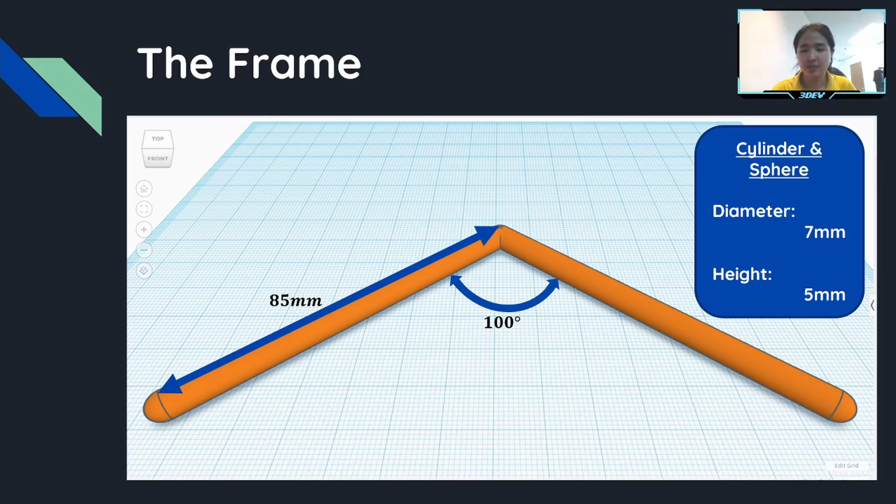Let's start to create this shape in TinkerCAD. Right now we are in TinkerCAD.

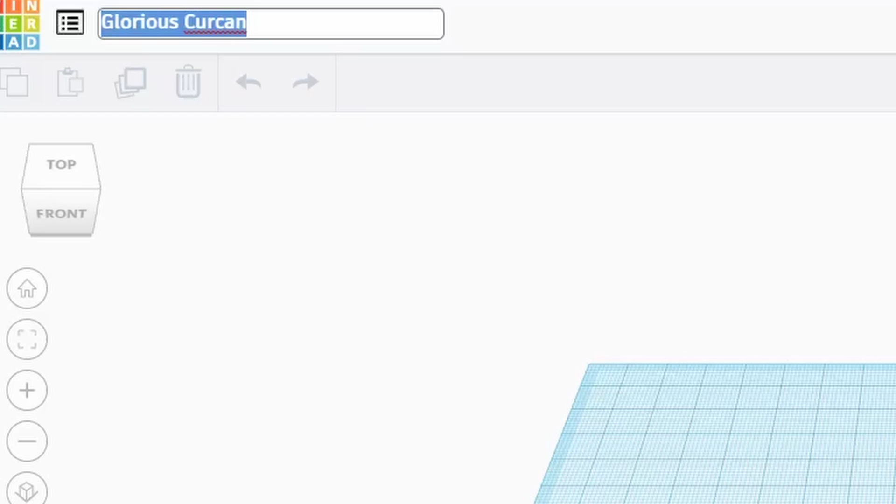First thing, we need to click on create new design to start design our self-balancing sculpture. So I click on create new design, and once I have the work plane, first I'm going to change the name. It is good that you always change the name of your project, so you know what project you are doing. I will name it self-balancing sculpture. Right now I have this project named self-balancing sculpture.

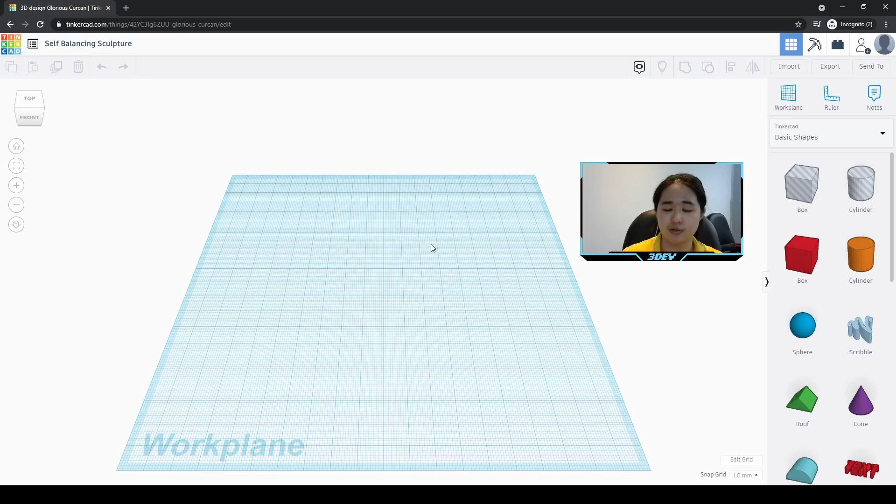So I have my work plane over here. First thing we need to do is create the frame. First, let's get a cylinder, and then we need a sphere also.

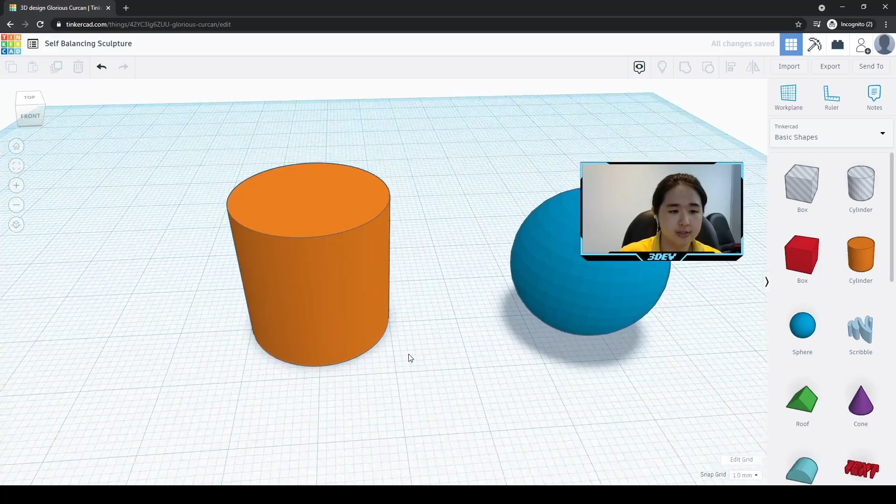First, let's change the sides of this cylinder to the maximum and the segment, or else you will see the points for this cylinder. So I will just increase the sides and the segment to the maximum so that I will have a smooth cylinder. Basically, first thing I want to do is make this round become oval.

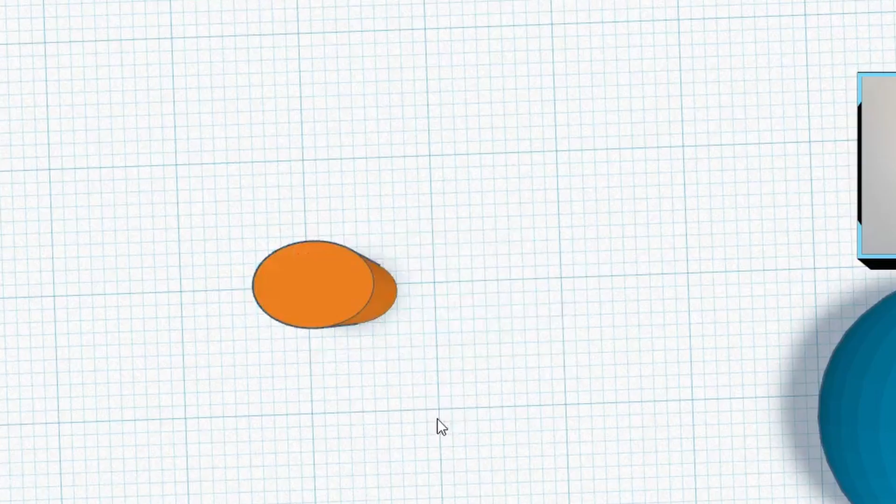Now I am at the top view. I want to make this a bit oval, so I'm going to change this one to 5 millimeters. And the diameter for the X, I will change it to 7 millimeter. Then we will get a shape like this.

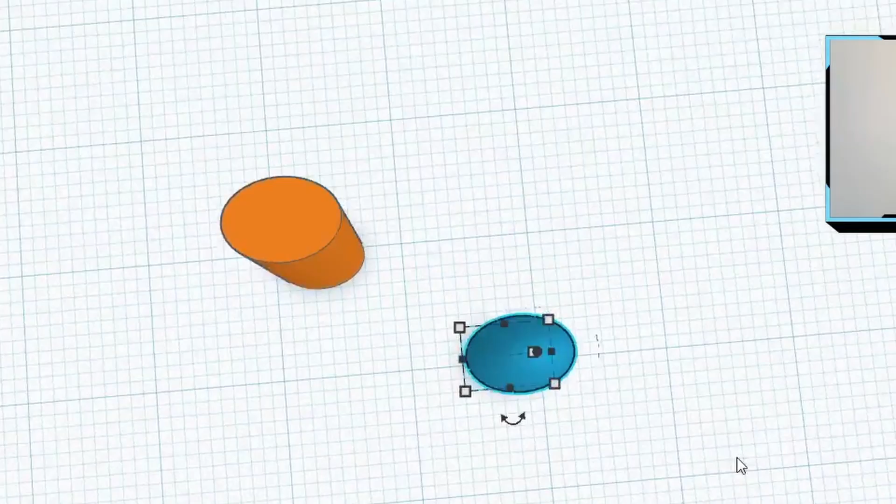Same thing for my sphere, I will do the same thing. Here for the X, I will change it to 7, and here I will change it to 5. This height I will follow the width that I set just now, 7. So this one I will set to 7 for the Z axis of this sphere, 7.

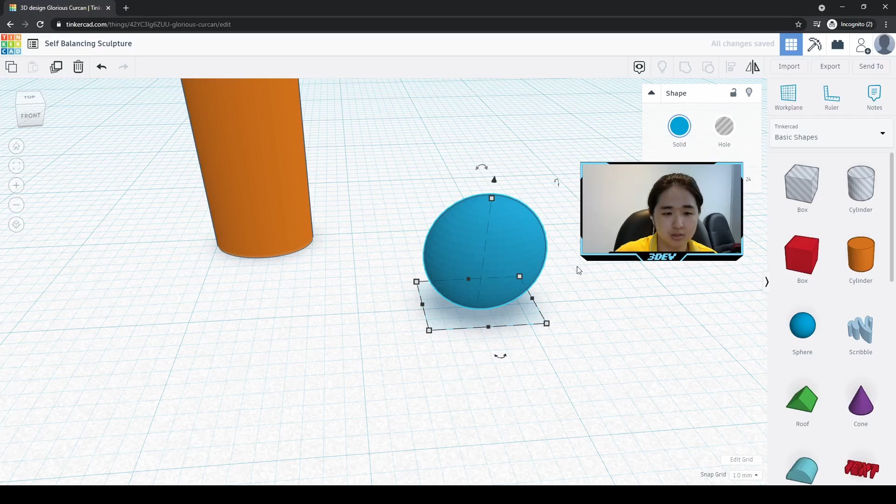Even for a sphere you also can increase the steps, so I'm just going to increase it to the maximum so that I will have a very round smooth surface. And for our cylinder we will need the height to be 85, so we will have a very tall cylinder.

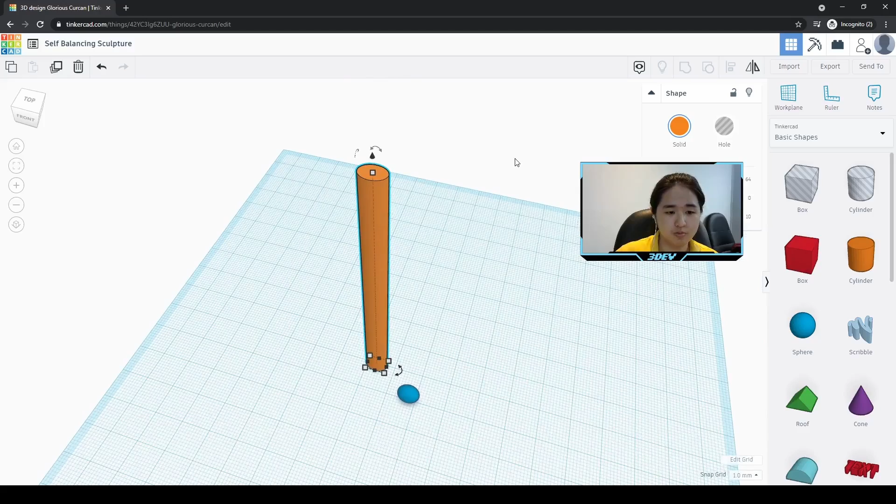Right now what we need to do is rotate it. To rotate it, you need to zoom out, and then you will have 3 rotations. So which one are we going to rotate? I'm going to rotate this one, over here, this one. You can see it's over here.

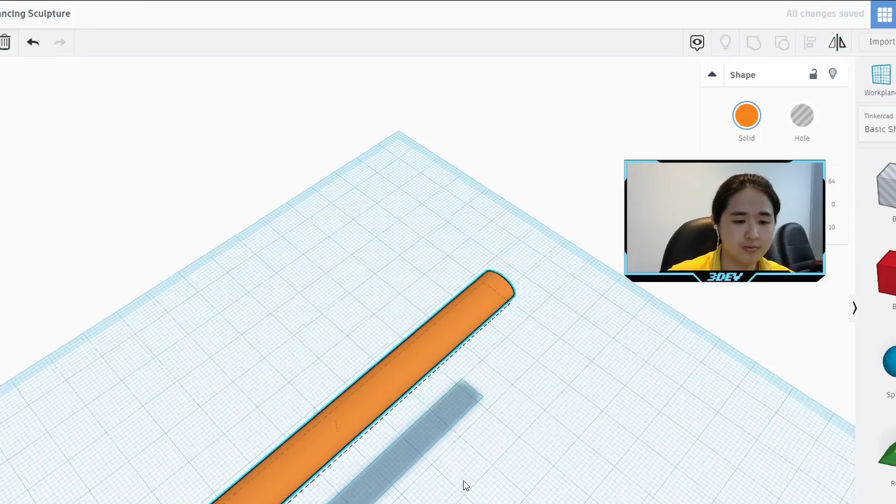Oopsie, it's here. I'm going to hold the shift and rotate it 90 degrees. Let me move this down to my bed, 0. Now I have one cylinder and one sphere. This sphere I also need to rotate.

So let's rotate it based on this angle, this one over here that you can see. Hold shift and rotate it 90 degrees. After that, bring it down to the base.

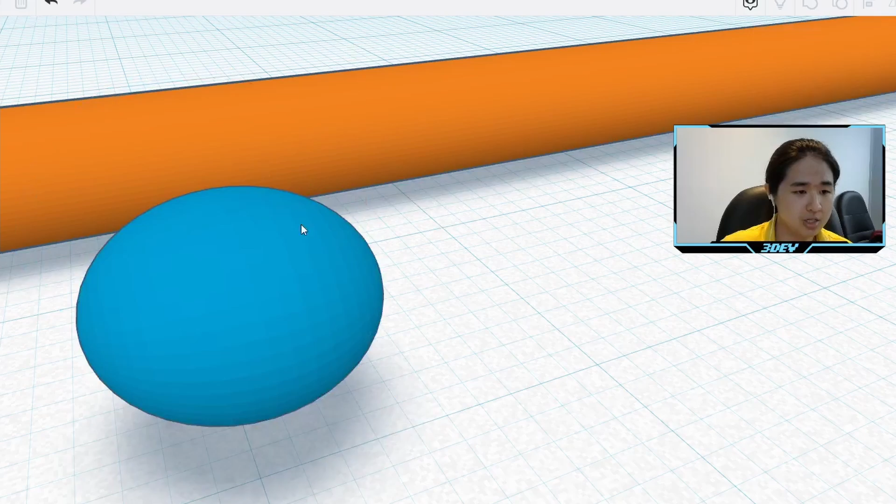Okay, now we have a sphere and a cylinder. So right now, what I need to do is align these two together. First I'm going to select everything, click on align, and make everything center first. For the horizontal part, center; vertical part, center also.

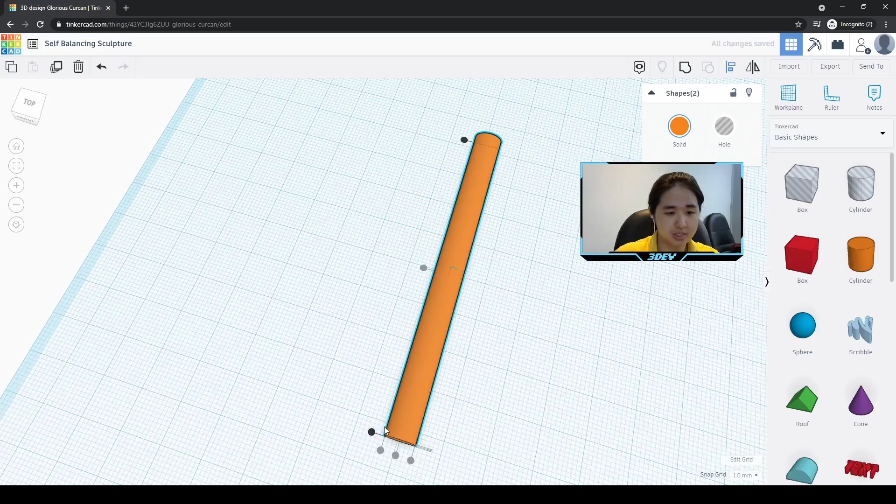Actually for vertical, if we look at this on the top screen, the y-axis I want it to be the end of the cylinder. Okay, so right now you can see that my sphere is actually hiding inside.

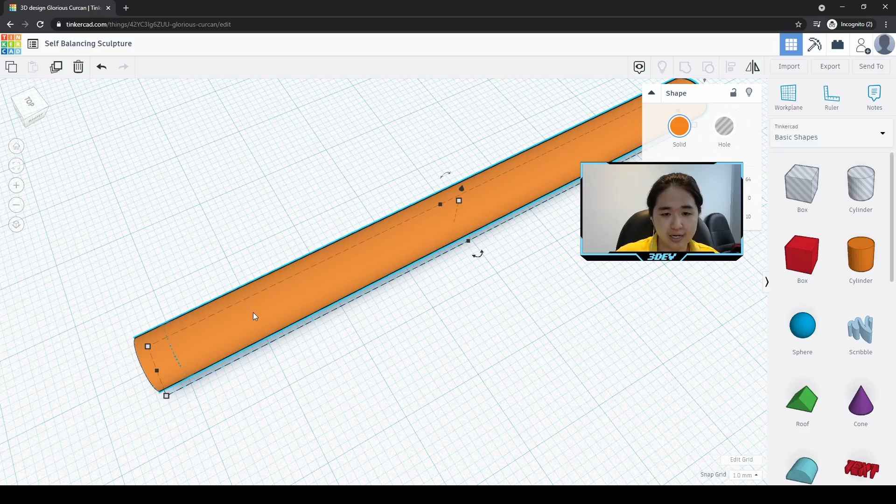So what I need to do is move this cylinder half the diameter of the sphere. If I move this away, now let's look at our sphere, go to the top view, zoom in, maybe click on top. Good, so this diameter is 7.

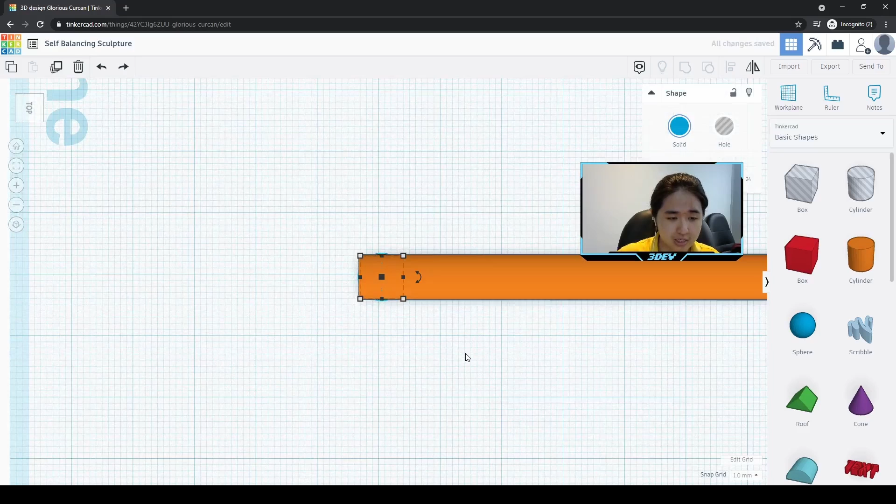So if I want the result just like this, which means I need to move this half of the sphere diameter, so I need to move it by 3.5 millimeters upwards, to the right actually. So let's move it.

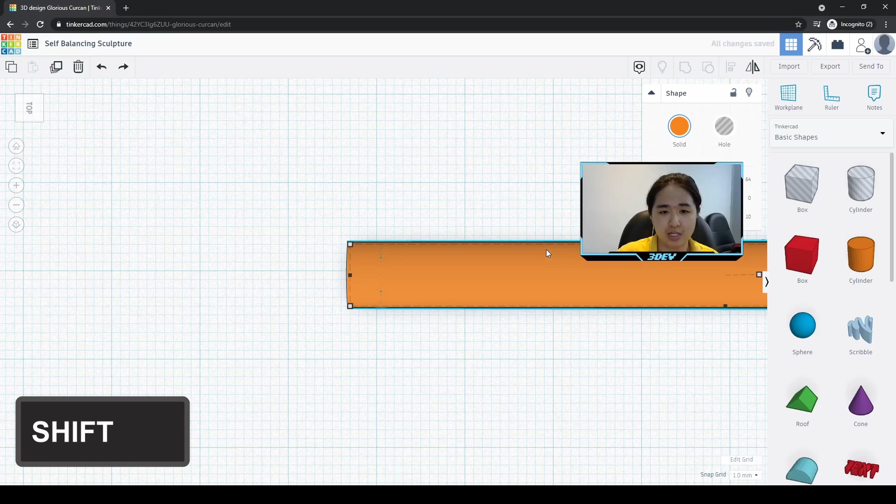I need to hold the shift like this, so it won't move around, it will only move either X or Y. So hold shift, move by the X axis, and over here you'll see a value. Since we want to move it by 3.5, let's change this value to negative 3.5.

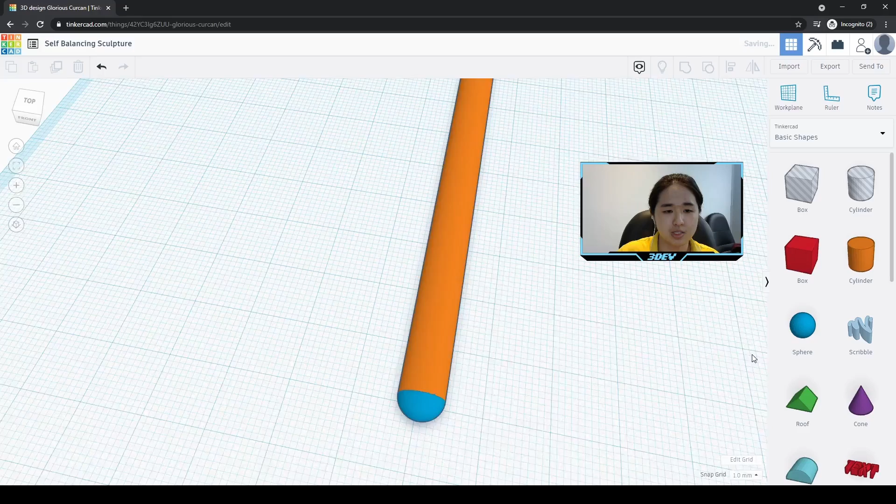And that's all. So I have one side, we need to make the other side of the frame. Let's highlight these two, duplicate it, and move it aside.

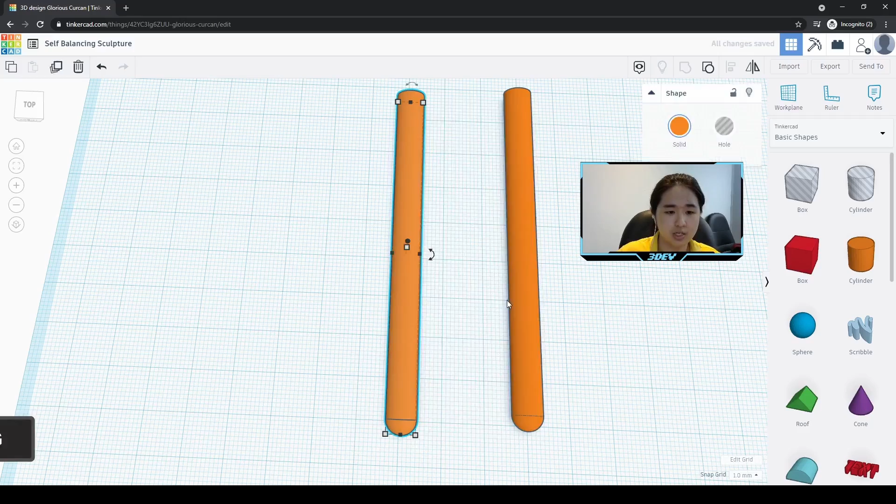Okay, right now what we need to do is align both of them together. First I need to group it, group it, group this, and align both. Cool, so right now I have these two.

So right now we have these two sticks. We know that both of them are aligned horizontally. Vertically actually, it's aligned vertically.

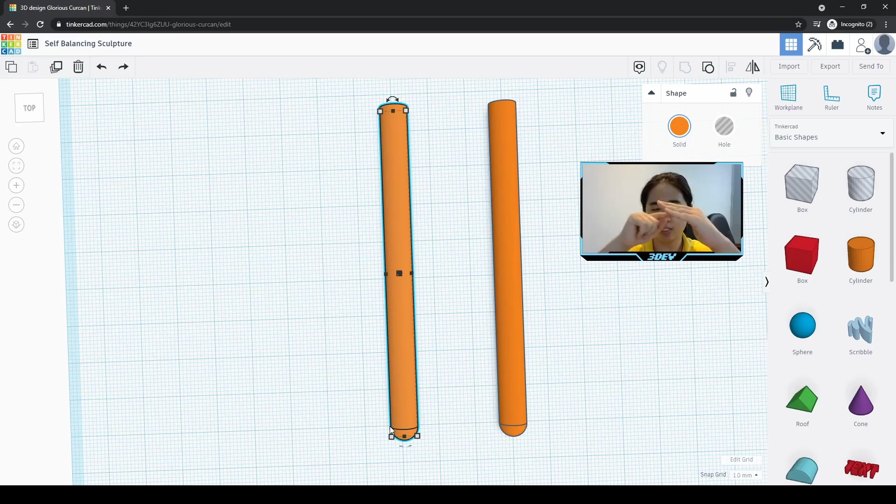So right now what I need to do is rotate this 50 degrees to the right, and 50 degrees to the left for this one, so that I will have an angle of 100 degrees at the center. Click on the shape that you want.

If you click this, you need to rotate this to the right hand side, left hand side. Make sure that this sphere is facing that side and this sphere over here is facing this side. So right now I'm just going to start with the right hand one. How can I rotate? When you click on the object, you will have a rotation handle over here.

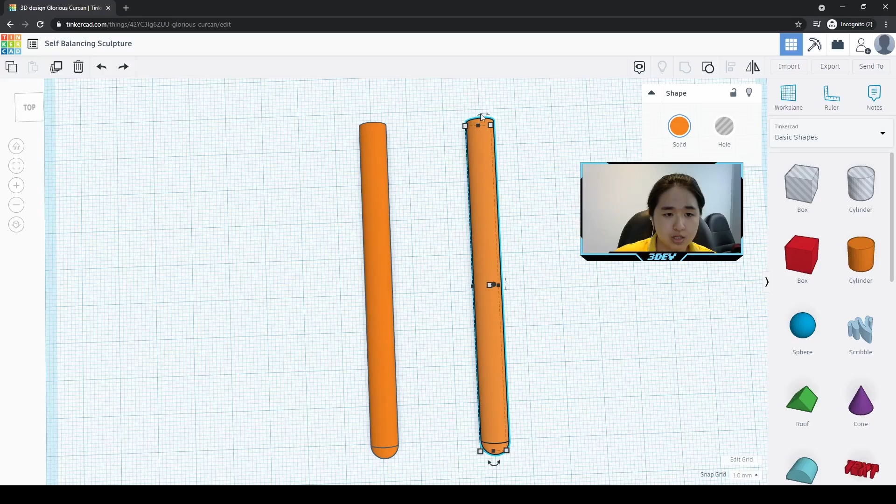Sorry, okay, let us just focus on the top view. If I click on the object, you will have the rotation over here, this one. This is the rotation you want to do for this axis. So click on it and rotate it by 50 degrees.

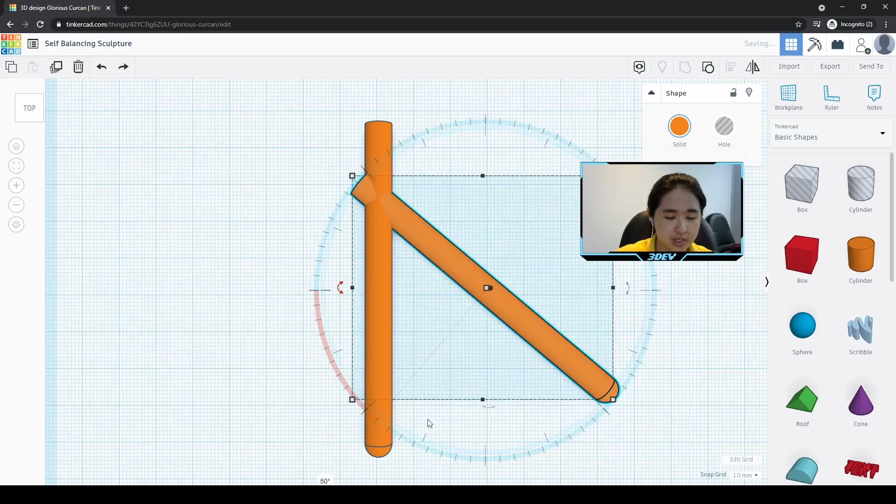45, I think we need 50. Okay good, so this is 50 degrees. One more time, I click on it, I move out and rotate it to 50 degrees. Oh, this is 51. So sometimes when you move by this point arrow here, it won't be so accurate.

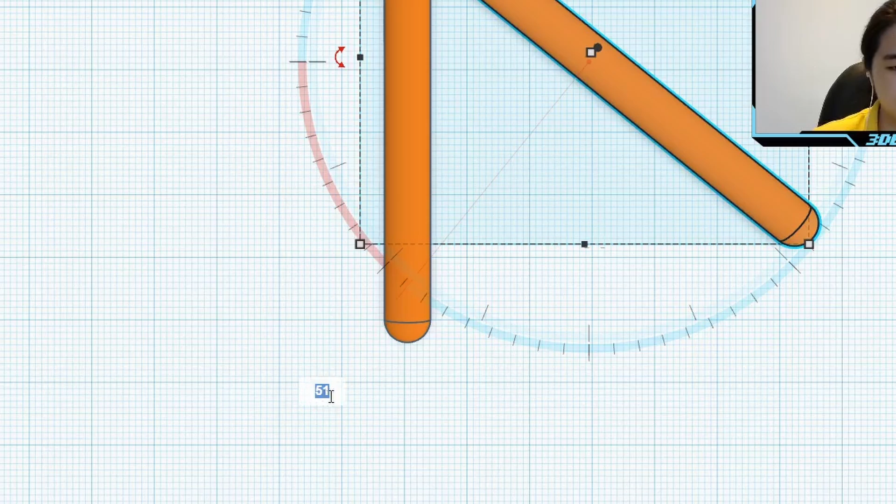So what you can do is, since we know we are rotating for 50 degrees, let's just change this value over here to 50. Same thing for this one, I'm going to rotate it upwards, negative 50. So this is 45, this is 50. How do I know it's 50?

Let's do it one more time. Okay, 50 is here, 50, this one. Or if you don't want to rotate it using this numbering over here, you can straight away just change this to minus 50.

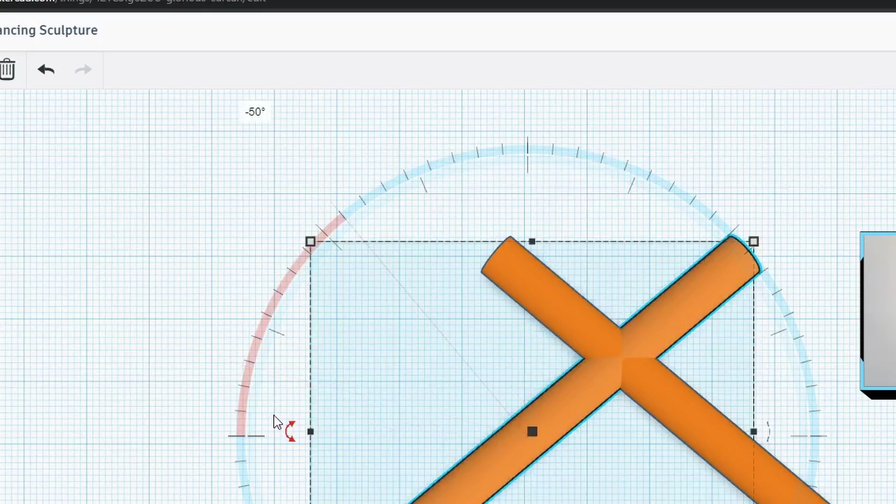Okay, now we have an X. So let's align both of them together to the center. So you will get this.

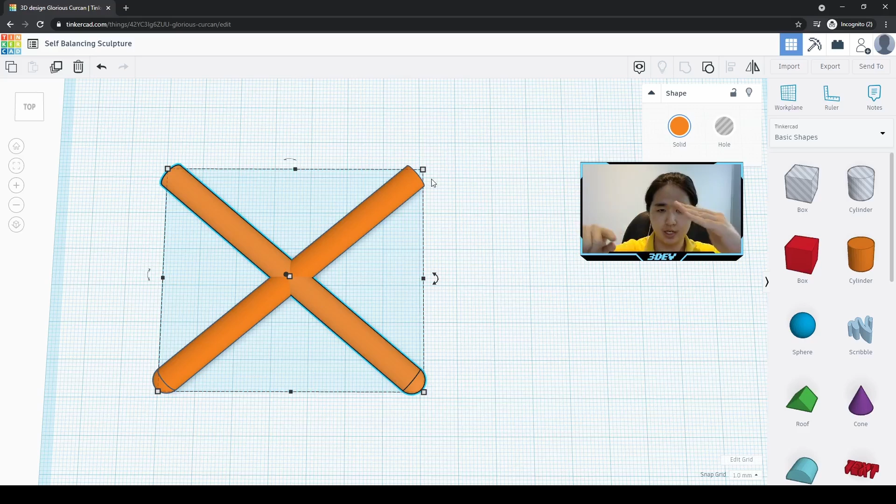So right now what we need to do is let me move this to the side. I need to move this one to the right, so that we will have a frame over here, like an A. Okay, roof. So let me move this.

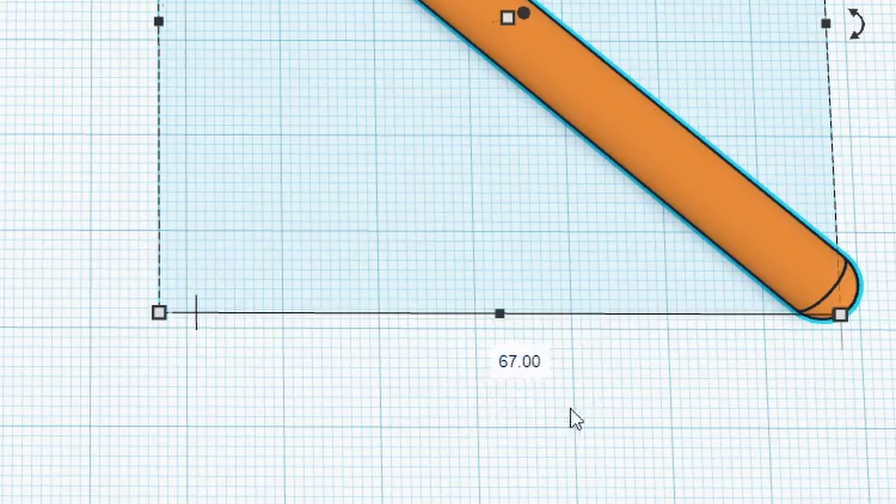I'm going to hold shift and move it to the right. So how much millimeter am I going to move it? I'm just going to move it for around 67 millimeters, like this. So this value will be 67, and that's all for your frame.